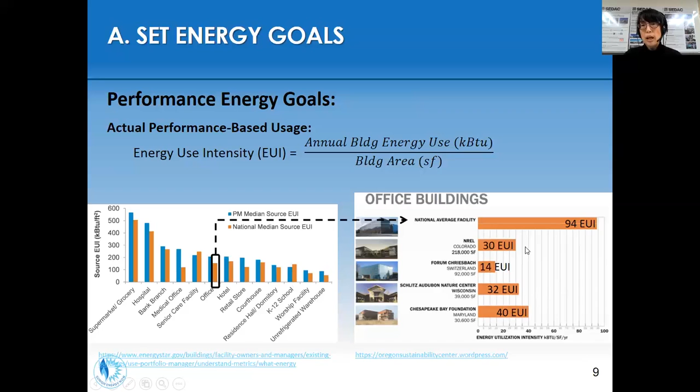And this one, the 14 EUI, happened to be in Switzerland, but the rest of these three are all in the US, one in Colorado, Wisconsin and Maryland. So depending on your building type, you can see the national average. And also you can look at other good examples to set your performance energy goals for your high performance building.

And the second point in the high performance building: pick the right team. So experience as well as commitment matters. So look for these qualities in your team members. The first one, experience working within a fully integrated design process. Second, prior success. Third, the emphasis on energy modeling.

And fourth, enthusiasm. And the last one, clear buy-in on the team's energy goals. So everybody could be on the same page and everybody can work together to achieve those goals that you just set for the high performance building.

So what it shows is the importance of the earliest possible point in the design process, because that's when you have a high saving potential with the least cost. So that is very important in the earliest possible point. And also, it is important to maintain that commitment throughout the process.

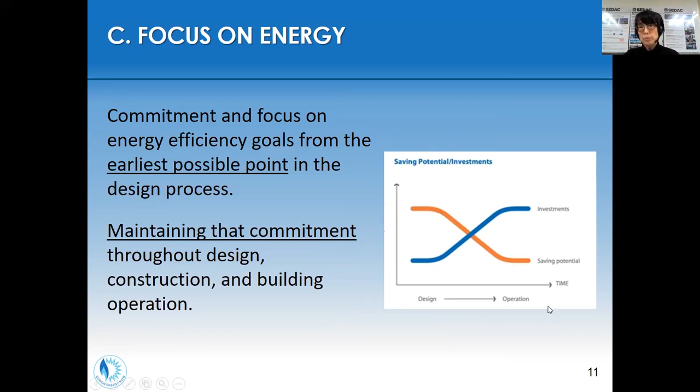Next, in the high performance design, the first step was setting the goals, and now it's time to verify your energy goals. And how do you verify your design energy goals? We say energy modeling is a good tool. So we recommend having an energy model in the early stage and also often. So not only one at the end, but actually, it evolves with the design process.

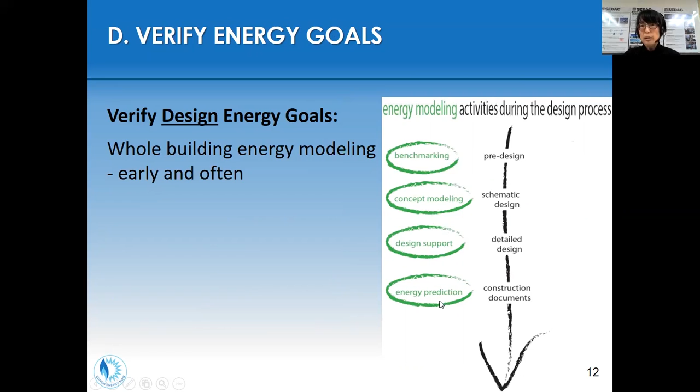So in the pre-design or early design, you use energy modeling as a benchmarking tool, and then later on, you use energy modeling as concept modeling, and then design support. And when you actually have a construction document, you use energy modeling as an energy prediction of your high-performance design building.

Then how do you verify performance energy goals? We talked about performance energy goals as like EUI. You can do it by metering or sub-metering. And those are really important to actually measure how this building actually performs.

Also, you can use a tool such as Energy Star Portfolio Manager or an Energy Dashboard. You can look at the SEDAC newsletter. It covers energy dashboards. What it is is real-time energy consumption monitoring. So you can actually see how this building performs, and that's how you can verify your performance energy goals.

And then the last point in high performance design is plan to maintain. So staff training is really important. We've seen many buildings that have very sophisticated building automation systems, but once the knowledgeable maintenance person retired, the rest of the staff have no idea how to use it, and that's not a good thing. And the building cannot perform as a high-performance building.

So it's really important to have continuous staff training. And also the user training, the occupant training, is important. For instance, you have a very good daylight sensor and your fixtures are controlled by the daylight sensor, but your occupants have the blinds always closed. That doesn't actually work. So these are really important to emphasize to achieve high performance design.

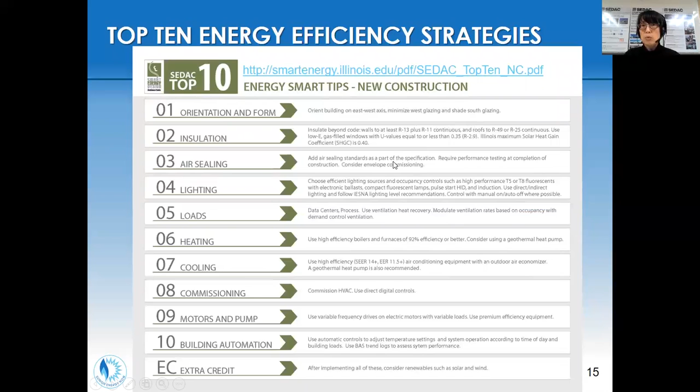So now we're going to talk about the incentives. If you click this link, this is a link to the 2016 and 2017 new construction program guidelines and application. It is a 30-page or so document, and it includes a lot of legal language, and it shows you the requirements to apply for the incentive, has some information on incentive rates, and also a worksheet and how to fill it out.

I highly recommend that you look through this application if your project is interested in receiving a new construction incentive. But contact us with questions, because I understand this could be a little confusing or daunting. So do not hesitate to contact us once you have read this and have questions. We're very happy to assist you.

So for the new construction incentives, in terms of timeline, in a simple way, I would like to say that if your project has 100% construction documents, it's ready to apply for the new construction incentives. And there are roughly two types of incentive in new construction: prescriptive and custom. And actually, you can mix and match both prescriptive and custom. I have an example of this type of incentive later on in the case study.

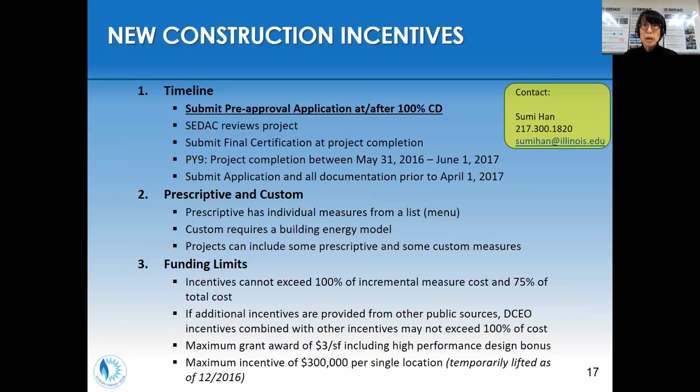So as I said, there is prescriptive, which is measure by measure: lighting, envelope, HVAC, water heaters, and kitchen equipment, and custom. Anything that doesn't fall under prescriptive, you can think of as custom. Usually custom projects have a building energy model, but that doesn't mean you need a building energy model to qualify for the custom incentive. The custom incentive is 8 cents per kilowatt hour saved and $2 per therm saved.

And the high performance design bonus. This is designed to encourage people to build a whole building energy model. So if you have a whole building energy model, then you can get the custom incentive, and on top of that, you can get this high performance design bonus, which ranges from 40 cents to $1.40 per square foot.

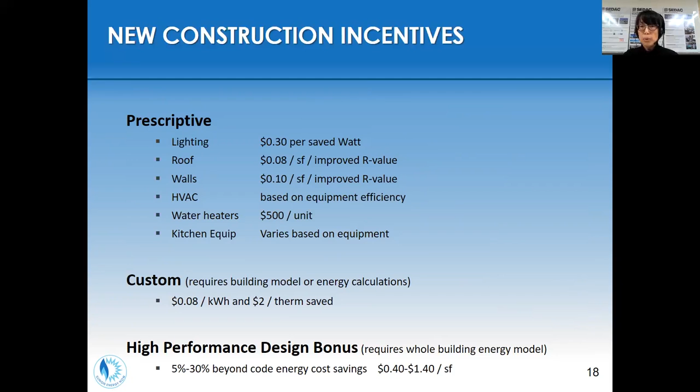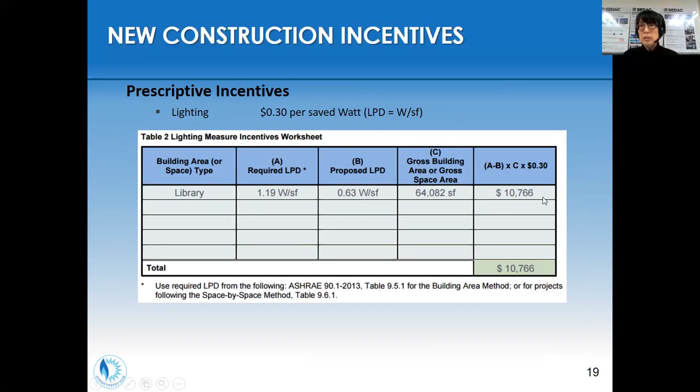And now we're going to look at some examples. These are screenshots of an actual application. Under prescriptive incentive lighting, if you have an efficient lighting system and use fewer watts than the code requires, for example, this project is a library. According to ASHRAE 90.1 2013, the required LPD is 1.19 watts per square foot, and this particular project uses only 0.63 watts per square foot, and the area of this library is 64,000 square feet. You calculate the incentive by subtracting 0.63 from 1.19 and multiplying that by 64,000, and you get about $10,000 of incentive for the lighting measure.

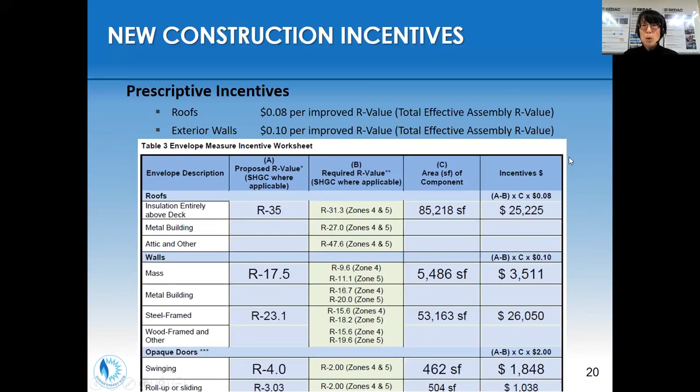The next example is the envelope. This particular project has R35, the required R value for zones 4 and 5 is R31.3, and the roof area was 85,000 square feet. The incentive was calculated by subtracting 31.3 from 35, multiplying that by 85,000, and then by the incentive rate of 8 cents. Then you get somewhere around $25,000. And here I want to emphasize that the R value here is the total effective assembly R value, meaning it takes into account the whole assembly, not just the insulation.

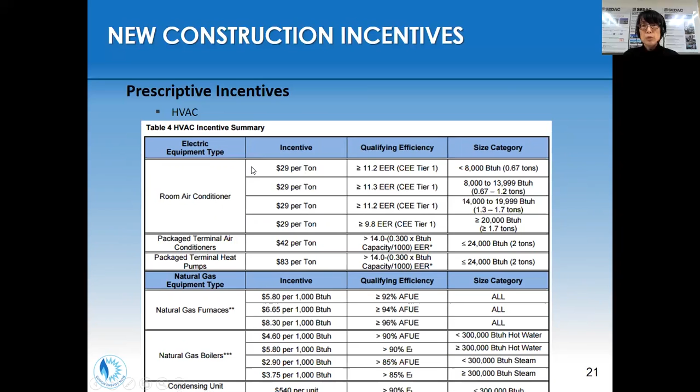And for the prescriptive incentive under HVAC, there are different HVAC systems, and if your HVAC system or equipment is more efficient than what is listed here as the qualifying efficiency, then you get a certain amount per capacity for each type.

And then custom incentives, here's the example. So if you have a whole building energy model, then you have a baseline energy model, which is code compliant, and you have a proposed energy model, which is your designed energy model. And hopefully this is always using less energy than the baseline. So for example, this project in the energy model, it says the baseline, the code compliance,

is using somewhere around 6 million kilowatt hours, and the proposed is using somewhere around 4 million kilowatt hours, and then natural gas is 130,000 therms for the baseline, and 128,000 therms for the proposed. And the way the custom incentive is calculated is that first you subtract the proposed from the baseline, and then you multiply that by the rate of 8 cents.

And then you get something around $174,000. And for the natural gas, you do the same thing and get something around $4,000. So this particular project got somewhere around $178,000 for the custom incentive. And because this project has a whole building energy model, they also qualify for the high performance design bonus. And the high performance design bonus varies on which baseline you use, and also how much energy cost you saved beyond code.

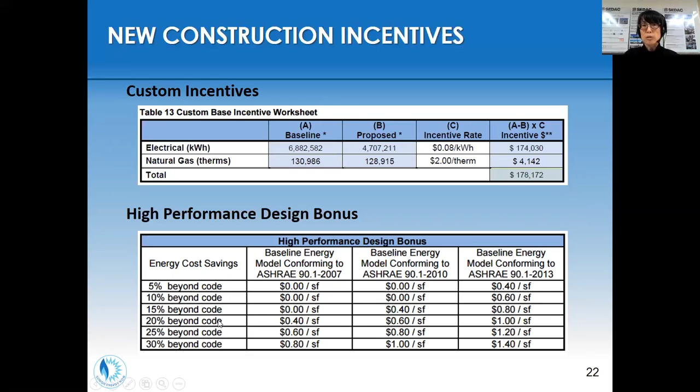And now we're going to talk about case studies. This is an example of a rec center at a park district. And this particular rec center used lots of LEDs, so they have a lighting power density of 0.82 watts per square foot. And they have a very efficient envelope system. They have precast concrete, so insulation is sandwiched in between the precast concrete. And they also have a ground source heat pump and very efficient domestic hot water. So they got a total incentive of $77,000, and they used a prescriptive incentive.

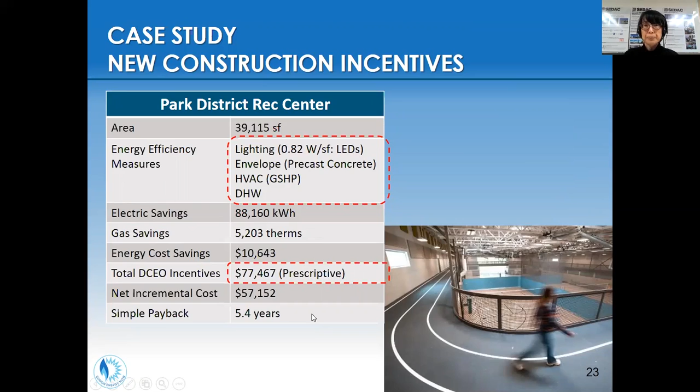The second example is a high school. So this particular high school has 0.89 watts per square foot as a lighting power density. And this one is an example where they used prescriptive and custom. So they got lighting and envelope as a prescriptive incentive, but for the heat pipes and heat wheels that they have to preheat the outside air, that was not required by the code, but they did it and saved some

energy. So they provided us the calculation done by the manufacturer of the air handling unit, and SEDAC reviewed it and thought it was reasonable. So we recommended the custom incentive for that. So a total of $110,000 was awarded to this high school.

And then an elementary school. This elementary school has 0.66 watts per square foot of lighting power density, and they have very efficient windows, and also they have a geothermal HVAC system. This particular project used prescriptive, meaning they didn't have an energy model, and they got $61,000 of incentives.

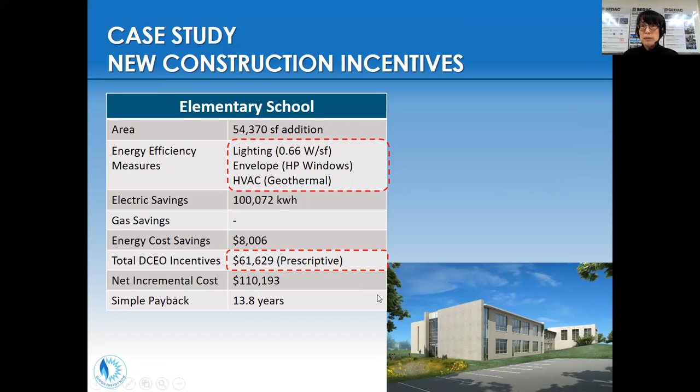And I think this is our last example. It is a university teaching laboratory, and they have LEDs and T8s, and they have a lighting power density of 0.70, and they have heat recovery chillers. And they didn't claim any gas savings, but they claimed lots of electric savings. And because of the sheer size of this building, they got lots of high performance bonus, because those are calculated per square foot. So in total, $266,000 was awarded to this project, which includes custom and the 30% beyond code high performance bonus.